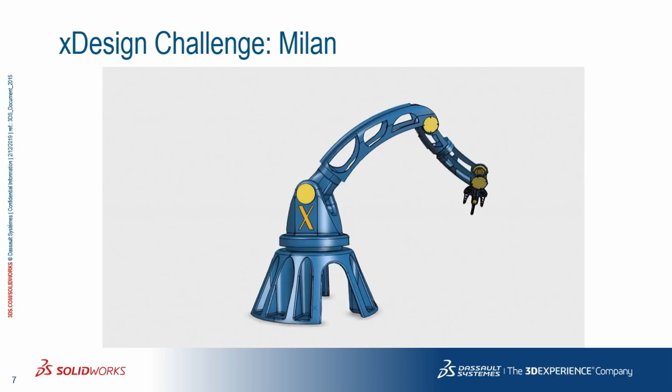So fast forward, we're here today. We've got the current release of XDesign, which I have to say is much, much more stable than it used to be. If anybody did any of the alpha sessions on Saturday or Sunday, I sat down with the recent release of XDesign, and I don't think it crashed once. And we were doing all kinds of new features and new functions that aren't even in it yet, and it was very, very stable.

So they're heading in the right direction, but you got to remember, it's a very, very young software. We're talking brand new, all right? So you're going to have complaints. There's going to be things you don't like about it. I have my list of things.

What you want to do is take that information and get it to SolidWorks. They need to know what's lacking in the software so that they can finish it. There's guys like Divi Lohiya, who's part of the definition team, Sal Lama, if any of you guys know them. They're the guys to contact. They're working on this project as we speak, and they need your input. SolidWorks, this is built with customer input. All of the software that Dassault makes comes with customer input. They're not just going, let's make this because we want to do this function. They make a function because somebody asked for it. So ask for it.

Yes, you can, and we'll talk about that. I'm gonna try to switch back. Does this sound like garbage? Up here it sounds terrible. You guys sound fine? Okay, it's throwing me off like something. Whoa, I hate doing the microphone because I always just present loud. As you can tell, I can fill the space.

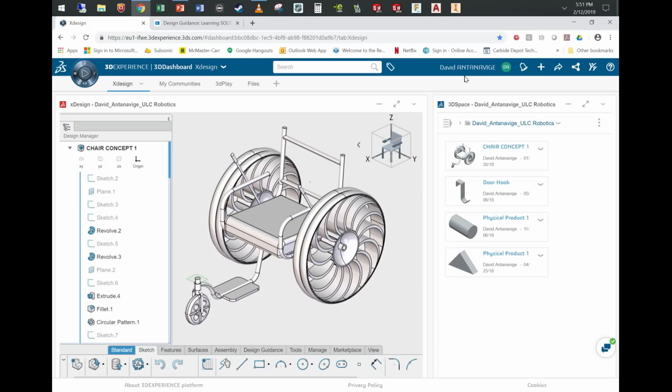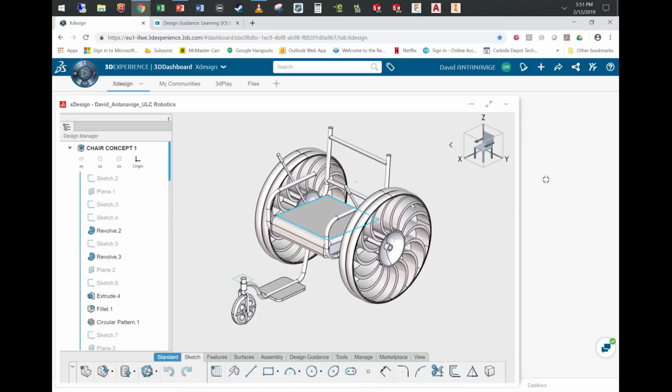When you create your first dashboard, it's up to you what it looks like. You can basically put little XDesign over here, 3D Space over here, grab 3D Play and drop that in the middle, and do all this stuff. You can customize this to whatever you want. It's really flexible. The intention is that you have what you want on the screen at any given point, the way that you want to view it.

So I'm just going to maximize XDesign for a second. Looking back up at the compass, this is where you start to drop all those things on the screen. So for example, I'm going to make a new dashboard really quick. I'm just going to go up to the top. You can see I've done this a couple times. I'm going to add a new dashboard, completely empty. I'm going to call it XDesign 100 because I feel like I've done this 100 times. And it's going to take a sec to load up.

Oh, and I should have prefaced, I'm doing this all live on the internet in a basement. Something's going to go wrong. Just bear with me, please.

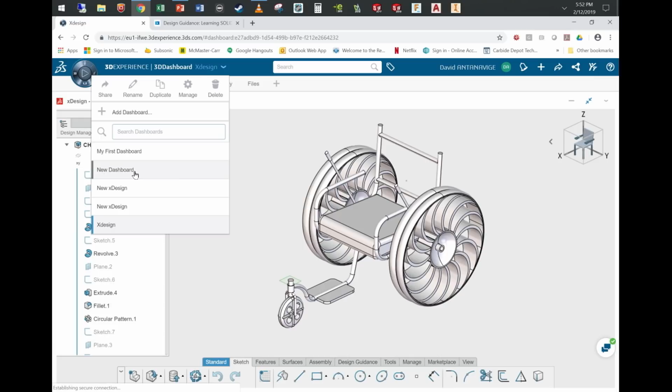New software. Here, we'll go to this one, new dashboard. This is probably empty. Okay, new dashboard. So this is what it looks like - it's completely empty, right? You don't see XDesign, you don't see any other drop downs. There's nothing. So you start by going up to the compass, and I'm just going to click on 3D modeling apps.

When you hover over any of these, it tells you what they're for. So up at the top is the social and collaboration one. I think this is the information and data one. And then if you're doing any virtual reality, crazy intense stuff, you go down here. But mostly you're going to be dealing with the 3D app or going up here to the collaboration section to pull up 3DSwym. So if there's a third part to this, there's the 3DSpace where all of our data exists, there's the XDesign app where we're manipulating all the data, and then there's 3DSwym, which is our community to share all the data.

It's a lot of stuff. The fun part is it's all just connected on here, so you don't really have to worry about it. If you're missing anything, you just go grab it - you go to the other link, the other section. And this system is set up so that if anybody is sharing stuff with you, you get little notifications over here telling you what's going on.

You can see up in the top right, too, there's a little icon - has everybody heard of 3DSwym? Does anybody know what that is? Okay, a few of you. 3DSwym is like a Facebook feed for this platform.

So, for example, if I go back to my dashboard, let's go to a good dashboard - XDesign. We'll close this so I can just show you what it looks like real quick.

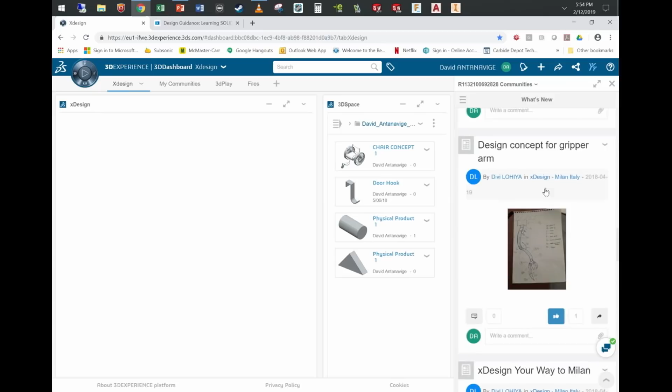So here's my buddy Kevin working on some parts, we typed some notes - 'Old guy in action,' said Thomas. Everybody just doing their thing, and it's just kind of a stream of what's going on. If anybody uses Slack or any programs like that, it's very similar.

The nice thing with this is you can attach all of your XDesign files to it. So like right here, instead of a picture, I could have an XDesign preview, and somebody could click on that and then pull up the whole model kind of live.

Is there a way to sort of filter this data? Like, do you have different projects? Yes. Yeah.

There are different swim communities. There's a public community where everybody's just dumping stuff on there, and then you can make your own community, or for your company, for example. You can have the ABC company community. It's private to you guys, and you can decide how the information moves on it. Does that make sense? Okay.

But we don't really care about that. We care about XDesign, that's why we're here. But you should just know about it. Another part of this dashboard is you can add tabs.

Let's say you really want to just have XDesign full on in the front, so I'm going to hit F5. F5 is your best friend for this, you're going to be refreshing a lot. You notice how XDesign wasn't there for a second, got to refresh. Again, it's new software, sometimes it loses. I'm also working on a Surface Pro 3 in a basement trying to use the internet, so we'll see how it goes.

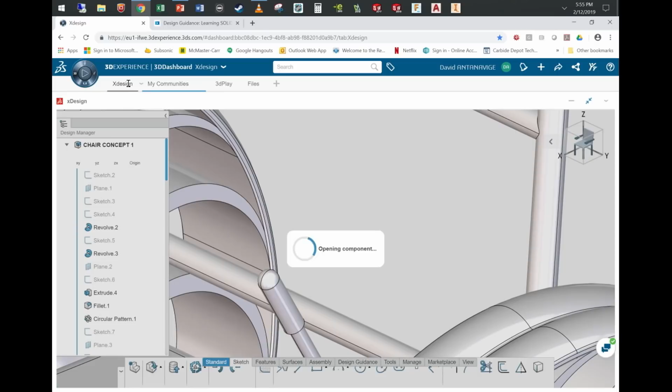But if you want to keep all of your community stuff on a separate tab, you can do it like this. So I've got my XDesign on one tab, all of my community information on another tab, and then my 3D Play preview window on another tab yet. And then I've got another spot where I've put all of my files, with my 3D drive on one side that handles my traditional files, and on the other side my 3D space, which handles all of my collaborative stuff.

You will see in the 3D drive sometimes some of the stuff that you did in the space. It tries to give you in the 3D drive access to everything. You just have to be aware that sometimes it's not a file. Like if it's an XDesign part in your 3D drive because you shared it with SolidWorks, for example, now you're working with a real file and it goes back and forth. It's a little confusing, I'm not gonna lie. But for the most part, it's all just backed up here online, and as long as you're naming new parts and making new parts, it's not a big deal.

So we talked about the dashboard, the feature tree. The feature tree in XDesign is now the design manager. You'll see here it's kind of typical to what we had before, you've got your planes and your origin. For future releases, you're not going to see those, they're going to go down to a different part of the tree. So don't freak out if you join the thing in another month and wonder where things are, there's just going to be a subcategory for the origins and all that stuff so they can separate stuff out easier.

But as you look down the tree, it's pretty typical to what we're used to seeing, right? We see all the features, we see them in order. We can guess that there's a line over here, that's probably our rollback bar. So we can go ahead and roll back to different points, delete features out. You can rename them, whatever you want, just like we would in SolidWorks, right?

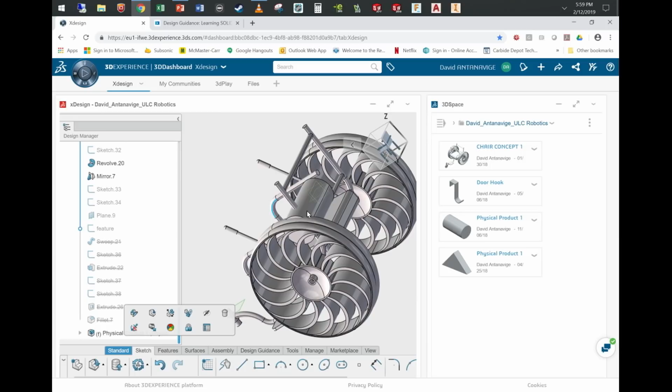No, you can't dissolve it. There's no dissolving it. It's just in there as it inserts it as a feature, like if you were doing a sketch or an extrusion. But then that feature, this file in here, if I edit it inside of this, doesn't necessarily push out to that part. It's part of this file now.

I know that sounds weird. It is a little bit weird. What happens if you edit it over on the right? Then it'll push the update, but I've got to update the whole assembly. So it kind of works all ways, some ways. It all depends on how you set up your permissions and things like that.

But anyway, let me back up a second. Okay, so you'll notice as we go to the top, my mouse is not being awesome. No bodies, no surfaces, no nothing. It's just stuff in a tree. So it's very different. When I first got on it, I wanted to hide this body, move that body, do all that stuff. You can still merge the bodies. It still treats them as bodies in Boolean. But you can't just go separate by a body.

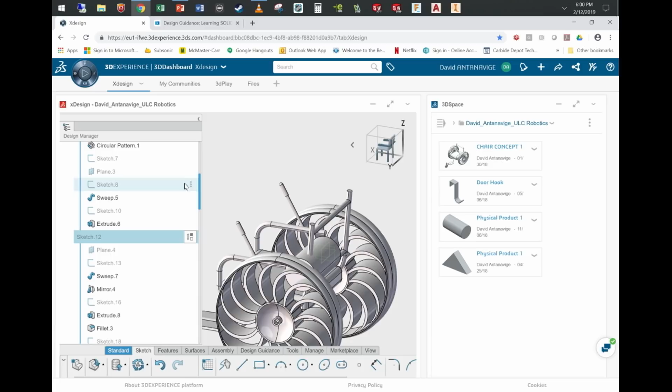What you would do is probably insert it. Oh, come on. That's cute. So we're going to do another F5. What you could do is insert that feature as a part, basically. You do like I did, and that's how you would treat it as a body. So you'd have to do it individually like that.

All right, so let's just check back what we missed real quick. We talked about the 3D space, how you get the app on there, and then the user help. Down on the bottom, these are where all your features are. We're used to having the command ribbon on the top, we've got it on the bottom now.

If we go down to Tools, we've got the big question mark in the center. Click on that, brings up the User Assistant panel. You can go through all the help files here, and it'll give you videos and tutorials and all kinds of stuff for how to step through it. So that's where you find your help file.

All of your toolbars are down here, like I said. Right now it says standard right here. I believe there's probably going to be a professional version, like they do with everything else, that'll come out at some version, a premium version that'll have more features, like simulation or whatever rolled into it. I'm just spitballing, but it seems like they're setting it up for that.

I just want to talk about the toolbars real quick. I think we're at that point. Time we got there. Okay, any questions on that? I'm sure there are, it's kind of ridiculous.

Real quick, just about the workflow. Yes, so that wheelchair - if I was to make that, I would have made all these different parts and assembled them. No, that's all, I just built it. I started in one end and just built it out. I think I started with the frame, then I made the seat, then I made one wheel.

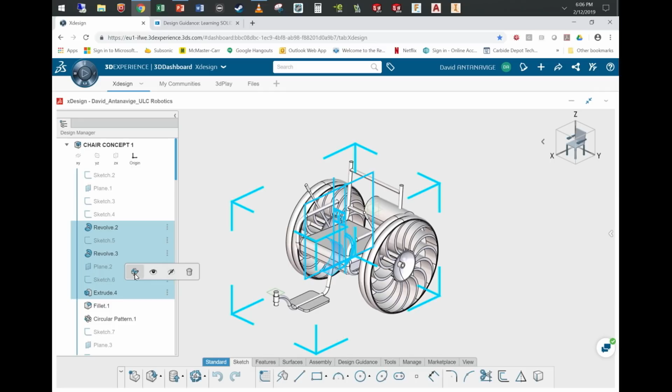So it used to be when you click on these - and I think if I do that right now, if I hit control and start grabbing, you can see I don't really have many options. All I can do is hide, show, edit some of the features, or delete. So they've got the new stuff coming.

But this keeps happening, this mouse doesn't like stuff.

Anyway, alright, let me just check how we're doing here on time. 5, okay, we've got till 6. You guys are still with me? Nobody's asleep, I don't got to do my DJ horn - bow, bow, bow. No, I was going to start with that, but I figured it'd be a little uncouth.

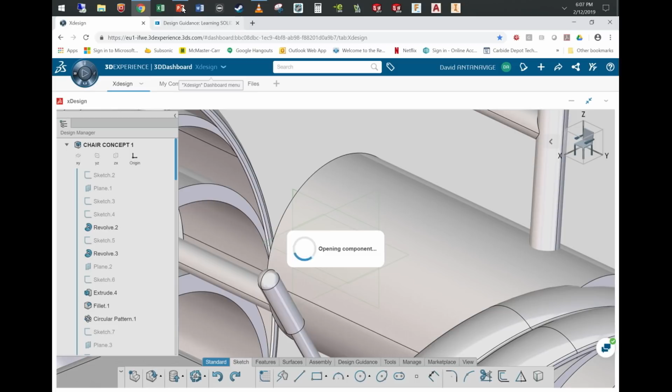So we'll move on. Okay, so we got XDesign reloading, let's drop back into the PowerPoint just for a half a second. And you'll notice I just did another F5 - I'm just refreshing. When I get errors in this thing, I don't wait for them to solve themselves, I just hit F5, it refreshes the browser, and you're right back where you were in 2 seconds.

This mouse doesn't love anything, though. All right. Wow, really? What's going on? Losing mouse functionality all of a sudden. This is fun.

Is it touchscreen capable? Yes, it is. I believe they're adding a feature where you can just sketch, draw on it with the stylus, and it'll drop in the sketch features, like they're doing in SOLIDWORKS 2019. So you'll have that.

Let's talk a little bit more about the GUI. I'm going to drop back... oh man, I'm having some nice issues. Server connection lost. Good times.

Don't worry, when it gets to the harder stuff I've got it all on video. We're just going to brute force through the GUI.

Looking across the bottom, we have all these various toolbars. You guys are going to recognize most of this stuff just from looking at it. We all know how sketches work. This is that gesture tool I was talking about, so you just draw on there and it drops it in. The thing that sucks right now is no splines, so it's all just arcs and straight lines. I tried testing it, making all kinds of funky shapes, and ended up with like a square box.

Yeah, exactly, for touch. So I assume it's going to be in here soon. I had a conversation with him over the weekend about it. I'm like, I want my spline, give me a spline so I can do some nice airfoils and stuff like that. So it's coming, it's just going to take a little while.

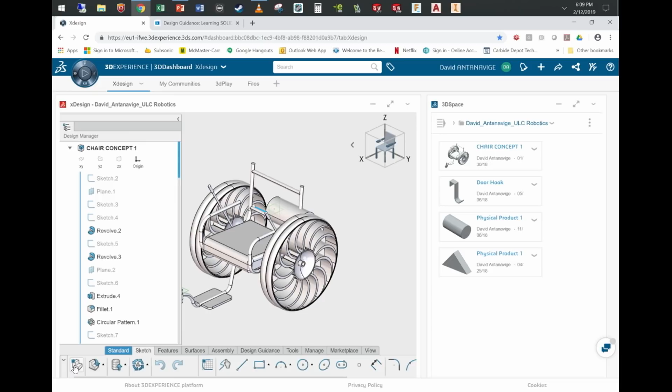But all the typical stuff—let's actually just start a new file. Click on new file down at the bottom. It asks you if you want to save, which doesn't really matter because it's saving anyway, but this is more of a so-you-feel-good kind of thing.

They literally told me that. They're like, people are just used to saving, so we added this in so they'd feel okay about saving it. Again, one more time, all right, we're not saving.

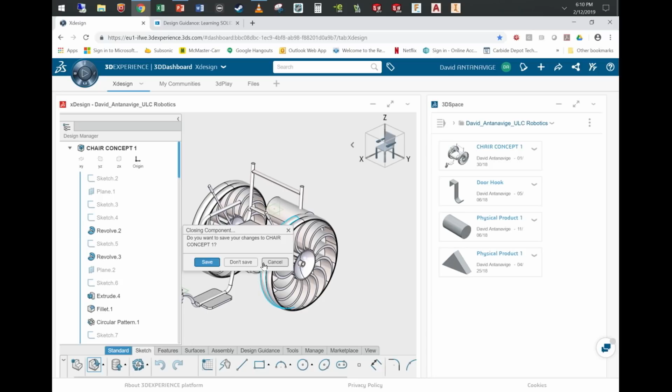Okay, so moving on, I'm going to expand this one more time. The first thing you do when you make a new part, it's going to ask you where you want to put it. I talked about the collaborative spaces, the 3D space—you've got to put this thing somewhere. You can't even start before you tell it where it needs to go, because it needs to perpetually be saving it. So I'm just going to put this in my LinkedIn XDesign folder, creates a new component. There we go.

So this is what I was talking about with the change. I just made a new part, and apparently I just got the new release—I think that's why I was having issues, it was updating my release. Now you can see my X, Y, and Z axis and my origin are now in reference elements, and my planes are on top. That was the change I was talking about. Apparently they gifted me the release 10 minutes ago; that's why I was freezing.

An email would have been nice. Anyway, I thought they were going to be here too. They kind of shafted me, all my XDesign guys. So this is recorded, so they'll hear that.

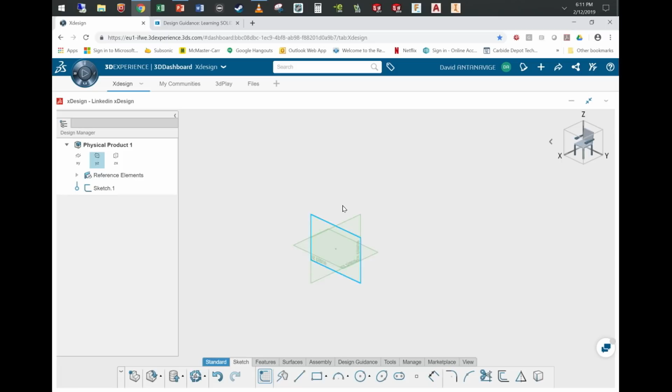So anyway, we go across the bottom—we've got all our typical sketch tools, right? So I can click on a plane, create new sketch. We all recognize these icons are the same ones in SolidWorks. Go in, just start sketching around, no big deal. What's kind of cool about this is it has all that shaded contour stuff built into it.

But it also has these automatic constraint flyouts. So if I click on one line, you can see the flyout toolbar automatically gives me a whole bunch of options. We don't have this in typical sketch—this is a thing that I really like. You know, when we're doing mates in our SolidWorks assemblies, we have those flyouts to do quick mates all the time. You just hold down Control, grab a bunch of surfaces, hit go, your mates fly together, your constraints fly together.

This is nice because now you can do your constraining on the fly without having to rely on things like automatic relations. If you've ever worked in big DXF or DWG files with automatic relations, it's crazy, it gets very cumbersome. SolidWorks wants to crash, or you just don't get the relations you want—it makes things concentric you don't want, lines parallel to the wrong thing, whatever. I like this a little bit better because it just lets you dictate it off the bat. You also notice over here on the left, it automatically put in a dimension as well, so I'm not going to another tool to put a dimension on it.

It's giving me the option right here while this is grayed out - do you want to assign a dimension to it? So all I've done is clicked on this thing, that's it, and I've got all of these options already. I think that's pretty sweet, and it's the same with all of the other features as well.

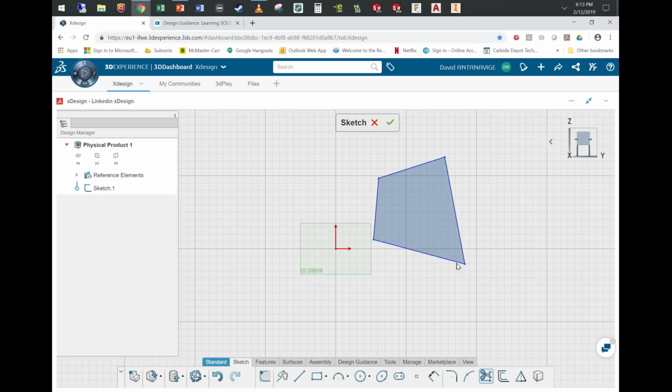We do have a trim feature. It doesn't work the same way as the power trim always does. There are some situations where it behaves a little bit differently, but generally it's identical - just trim. Doesn't have the go back option though, right? The go back and untrim my trim - so that's a little lacking, but they're working on it.

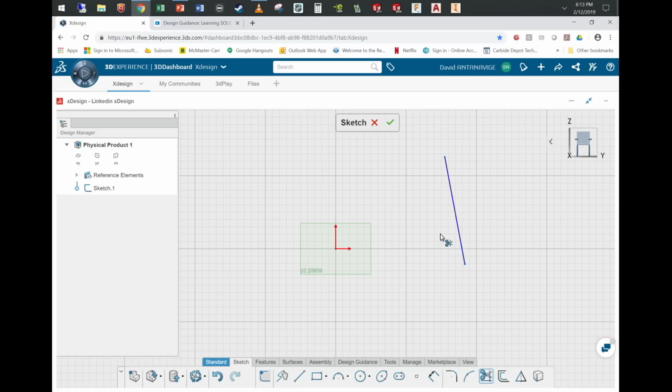Offset, mirror, we know all about that, and then convert entities, right? So you're working in a different area. I always say steal everything you can - just steal geometry, stop remaking it.

Yes? Are you saying there's no control key? No. In Power... I just did Control Z. Control Z. But what I mean is, in Power Trim, if you guys might not have noticed this...

As you go along through an entity, there's a little dot that forms right there, and if while you're still holding down the mouse button you back over the dot again, it brings that entity back. We all do it - I trimmed 5 things I didn't want to trim on accident. Don't let go of the mouse button, you just drag back over those and it'll pop them back for you. You can kind of do a back and forth thing, but they don't have that here yet. I like that feature a lot because I'll be trimming stuff and kind of be like, is that right? And go back when I'm doing huge layouts and stuff like that.

So that's our sketch tab. I'm going to move it along a little bit because we do have to get through a lot of stuff.

No mouse gestures yet, but I was told they are working on mouse gestures. Actually, this release might have them, I'm not sure, but back in October there was still not mouse gestures, but it's on the list.

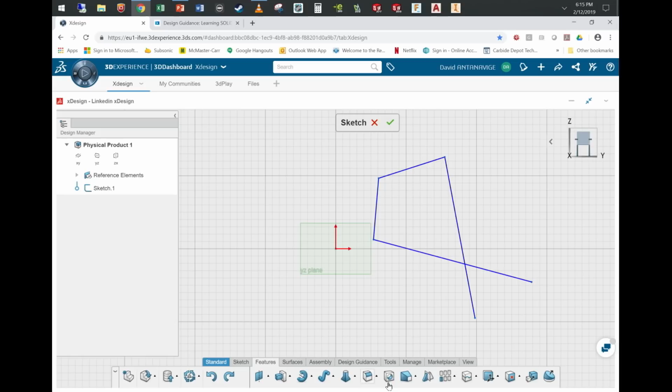So that's the sketch. All right, features - we've got all of our typical features down here like we had before. We've got planes, we've got extrusions, cuts, sweeps, all that stuff. There's one big difference with this one.

So I'm going to make an extrusion out of this sketch that I just did. I'm just going to select that profile right there - if it'll let me select it, we'll rotate a little bit so you can see I get the preview. You'll notice if you look right up here, we've got a lot of functions in one.

Your extrude function in XDesign works as all of the extrusion type functions in one. So if you want to extrude a body, if you want to cut a body, if you want to extrude a surface, if you want to cut with a surface, if you want to do a thin body extrusion, they're all here in one feature.

Okay, they don't have all of those features all blown out - all you have to do is click on the options. Right now, cut and new are grayed out because I don't have anything created yet, but I can make a thin feature or I can just make a surface. They have surfaces in here just like you would in SolidWorks.

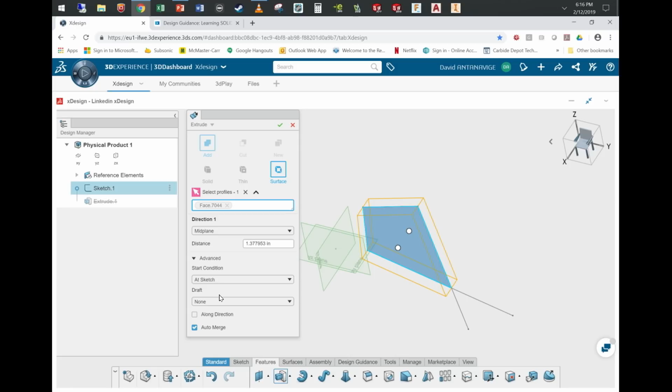It's got all the other options we're used to - mid-plane, up to geometry, advanced options, merging, all that fun stuff. We still have bodies that merge together and all of that stuff, they're just not multi-body parts. So anyway, that's the highlight for extrusion.

Most of these other features are all the same - the hole feature is a little bit different. Let me just back up real quick. We'll extrude this and put some holes in it.

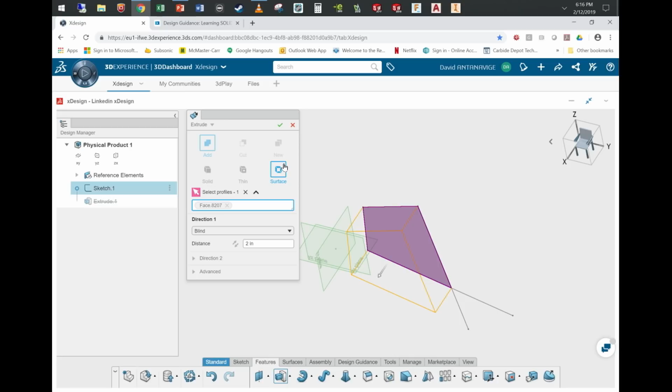What's also cool is if I go in to edit this, I can still change it to a thin feature or a surface after the fact. That's pretty sweet too. You can change your mind, and you can't do that in SolidWorks right now. That's pretty baller. But I mean, this is basic stuff, we're talking about extrusions here, so we can't get too hot to trot yet.

Hole wizard works a little bit different here. In SolidWorks, you could go to placement and just touch on a surface, and it would bring up a sketch and you could start locating it. With this, you've got to have that geometry in there first. It needs the points first. I don't know if that's good or bad, but that's just how it is.

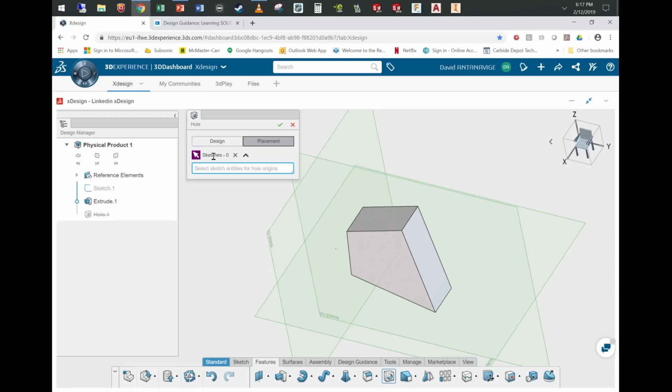So when I say placement, I'm going to grab stuff, and you can see up here it's looking for sketches. You need to have those points in there, but it works exactly like the hole feature we have now. You can customize it, use all the standards, they've got everything built into here. Pretty basic, but you've got to have that sketch on top and put a couple points in there. So we'll do just one right in the middle real quick.

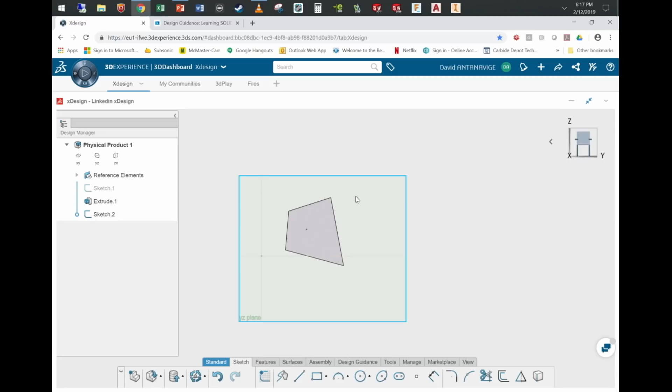Go back to the hole.

And you can move this stuff everywhere, you can customize this interface and just drag stuff wherever you want to, so whatever works for your workflow. I know I have some guys that operate SolidWorks and all their task panes are in like 3 monitors away. If that's what you're down with, you can do that with this. You just got to have the browser be big enough to fall into all of those. You can collapse everything down, all that kind of fun stuff.

Placement, so we're just going to select that point.

Is there no indication of fully defined sketches or anything like that? Yes, there are, just like you would in SolidWorks, it goes black.

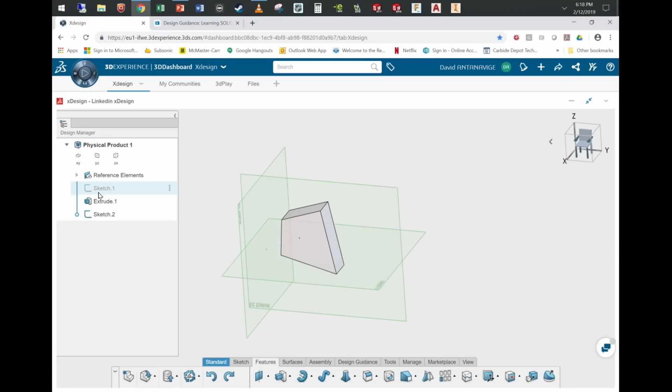If I go back to this first sketch, right now it's all blue, like we would normally see an underdefined sketch in SolidWorks. Nothing in the tree, no minus symbol. No indicators, yeah, your tree, the design manager, has very few indicators right now. Basically, you would just have to know that when you go... well, let me back up.

Who's fully defining sketches these days? You fully defining sketches? Yeah, for what? I'm curious, for what?

Why'd you do it? Or are the only people touching it ones who know better? Right, they know better, they're professionals. So I'm not saying don't fully define your sketches, that's the proper way to do it, but a lot of professionals out there just don't waste their time anymore. They use other things to control the features, or they put a note in there saying don't touch this, and you just go, because it's time.

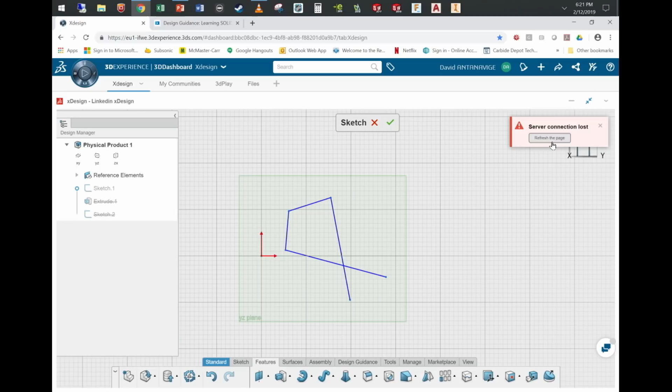Yeah, I wanted to see you define that one. Yes, I'm going to do it. I'm just refreshing it, lost connection to the server. That would suck. Yeah, just continually spending 30 seconds.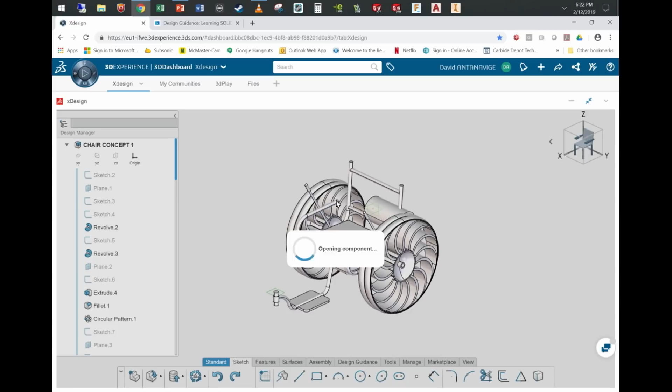Okay, let's go to the screen. So you got to have a good internet connection, not like in a basement in a conference room, and you probably shouldn't be using a Surface Pro 3 anymore to run it either, because even Chrome chokes this thing out a little bit, so it's kind of not ideal.

But anyway, so we were looking at that sketch. We'll go back. So my sketch that I started isn't here, right? We're not seeing it there. So I'm going to go back to my collaborative space, and we're going to go down to the bottom and find the physical product, whatever it is. So what is it... we got to find the one from today. This is the thing that bothers me.

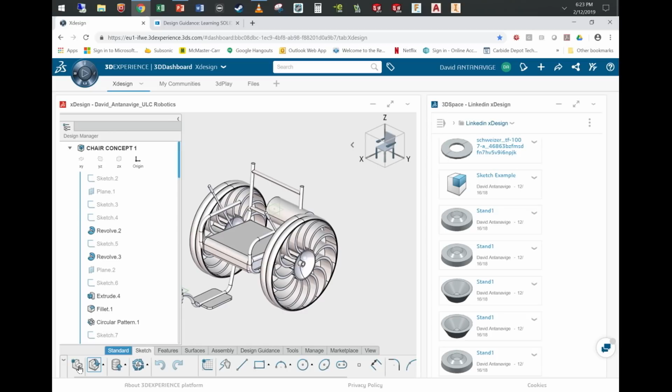Your internet needs to be very good, because here's what's happening right now. I was working on that sketch, that new sketch, and it saved everything—I'm telling you, it saved everything. But what I'm waiting for right now is for it to come back from the SolidWorks Dassault servers in Waltham to come back to me. So that can take some time. Again, it's new software, so you got to take it with a grain of salt. But there's other highlights we're going to see coming down the chute here. We'll speed this up a little bit. Okay, so I'm not going to talk about that right now.

I just want to back up one second and talk feature tree. We talked about that, design manager versus the feature tree—they're very different. We've got all these different toolbars. We started looking at the sketch tab, the feature tab. You've got all your surfaces, like surface features like you had before. And you do have some assembly features. Even though it's not a traditional assembly, they know you're going to want to treat things like assemblies. You're going to want to put mates in there, do patterns, mirror features.

Somebody was asking about the wheelchair before—like, I could mirror the wheel over, and half the frame I mirrored over. I just basically built half and then mirrored the whole thing. All those features are in here.

Tools tab—here you'll find, I would equate it to our evaluate tab that we have right now: all your measure features, your weight features, any draft analysis you're going to do if you want to send it over. They've also got some tools for 3D printing. If you have a Sindoh printer, it basically plugs right into this software, and you can just hit go and it goes right to the machine. They've got some collaboration between the two, but that's the only one I know that has that. Otherwise, you're just prepping your files to kick out to whatever machine you're using.

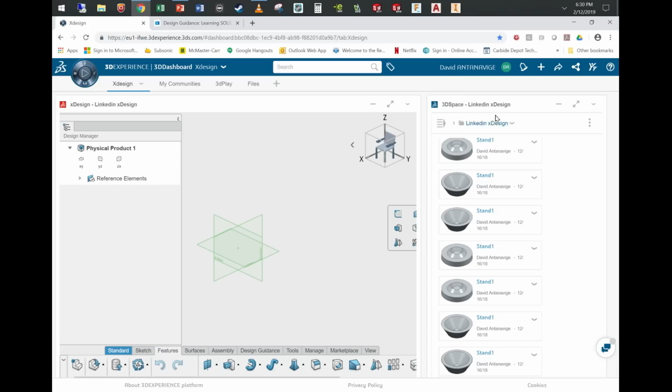As far as I understand, off the top of my head, because I've had to sign some NDAs to get access to the software—anything you create here is your property. But you have to pay attention to your 3D space you're working in. If you're working in the common space, everybody's there, everybody can see your stuff. Don't work in the common space, because once somebody else sees it, you're done—it's like anything else, you put it on LinkedIn, it's gone. So you want to use dedicated collaborative spaces, which you can create yourself, controlling who gets access and what users get in. It's all just funneled through Dassault.

Questions? Any other questions for design guidance? Okay, features—everybody's cool on features? I don't think I missed anything in these. Nope.

Like I mentioned, you can save, and you can do a save as if you want to make a copy. But again, it's always saving, so that's there just to make you feel good. They'll probably have a save as at some point, or a make copy button.

If you want to copy a feature or something like you do in SOLIDWORKS, I'm pretty sure you can do that. It might not work perfectly, because it builds features differently—whereas you might be used to grabbing a body or sketch and copy-pasting it, it might not always work the same. But when I've done 2D work, I've copy-pasted and made copies of stuff all over, and it was cool.

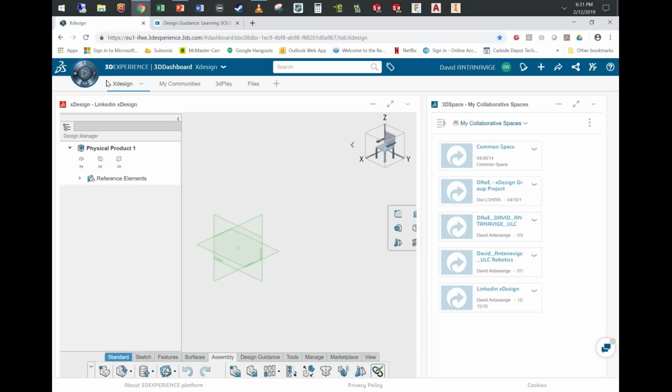Is there an export? Yes, there is an export—I just have to remember where it is. Would it be under share? I don't know, it's not. I think I have to do it from here. Well, can we move on with the presentation? Yeah, we'll come back to this. Sorry about that. All right.

So, design guidance—does everybody know what design guidance is? Generative design—has anybody heard of that? I'm getting some hands, or no hands. That's how I can gauge it, okay.

So generative design is—let's say I have a scenario, a water bottle, and I want to make sure I can run over it with my car because I'm crazy. You model up your water bottle inside XDesign, you can apply some loads onto it, and then say, I don't really know what the shape should be yet. Maybe I just start with a brick of plastic, apply some loads, make a cavity inside that'll hold the volume of water I want, and then let XDesign figure out what shape I need to handle the loads I define.

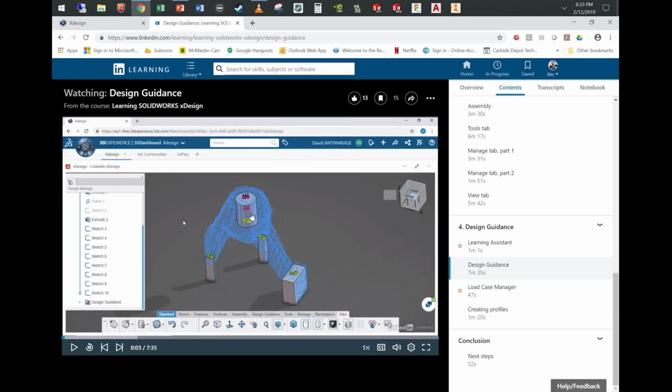If anybody's seen Desktop Metal's generative design product, it's very similar to that, though I don't think it's quite as powerful yet—they have a very powerful generative design software. But you can see in this example, we're basically making a stand. You have to define some locations, so you model in where everything's going to connect. I'm saying okay, I'm going to have a couple feet, and I did various weird sizes just to kind of prove a point in this example.

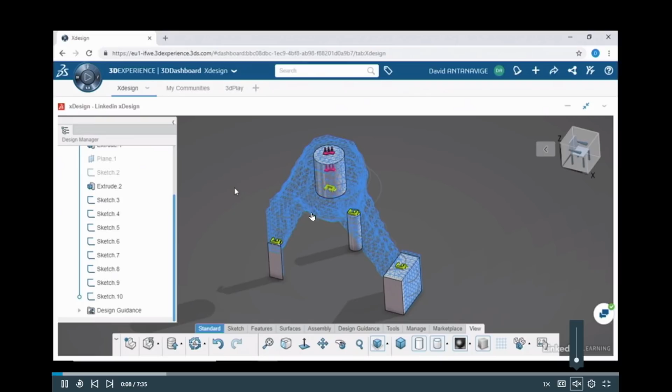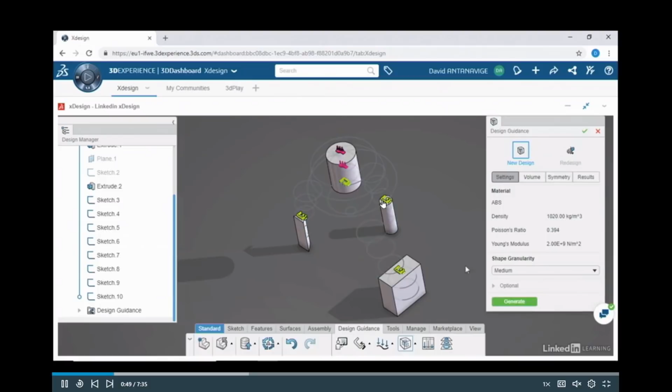But basically what you see here is the beginning result of the design guidance. As we scroll through, I've dictated loads at each of these using the clamps and load features down here. Then I ran a new design, which is what it's called, and this is the output I get. So I'm going in reverse, but basically you go into design guidance, say run this new design once you've set everything up, and you can adjust things like how much mass you want in it.

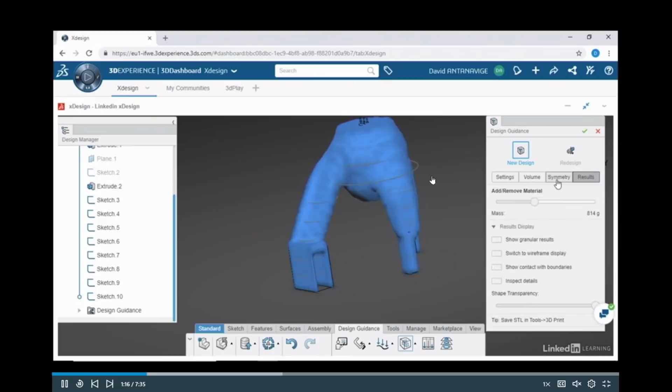Do I want it to be really thick in certain areas? Do I want to make it more granular? Do I want to redesign it because I've changed my loading in some area? Then you can take this output, it'll give it to you as a solid body, and you do what's called creating profiles, which will slice it. You say how many slices you want, and it gives you a sketch at every level.

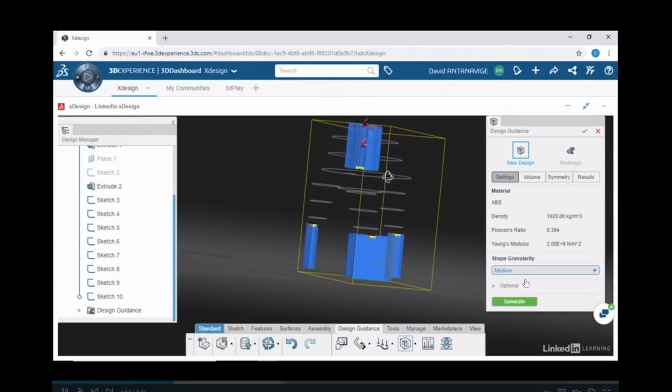So here I'm just messing around with the various options just to show how it changes. I've set a material as ABS because I'm going to print this out on a MakerBot or something like that. But it's pretty easy to use once you get into it.

It takes a while because it's online, right? You're asking it to do simulation results. And when I say a while, I mean like minutes, not like an hour. You might wait 10, 15 minutes if it's something very complex, but the simple stuff takes like a minute. I've done some simple ones where it's just 2 clamps on the side, downward load, takes like 30 seconds and it just runs through.

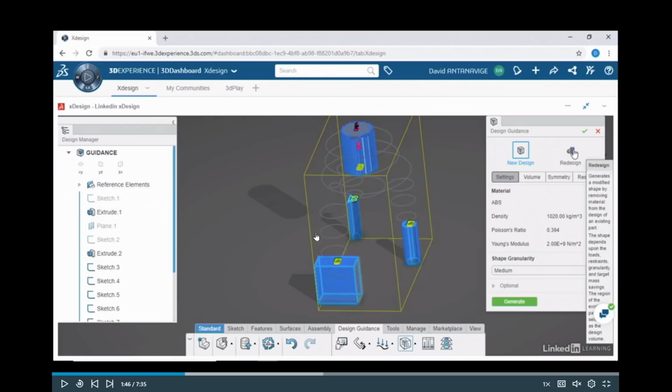So when we're in XDesign, let's see if I can pull up this example that we were just looking at. Notice how I have 2 XDesigns open too? You can do that.

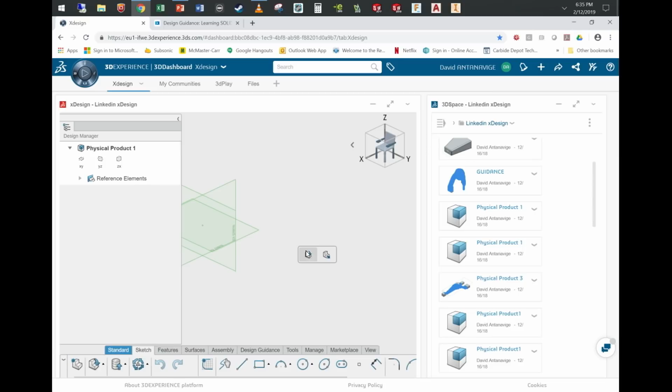All right, so this was one of the design guidance parts we did. You basically start from left to right.

If you want a specific surface not to move at all, you use what's called a clamp. So like this surface can't move. It's a hard extent of something, it's the corner of my bracket, it's whatever. It can't move. The earth is there, whatever, that's how you do that.

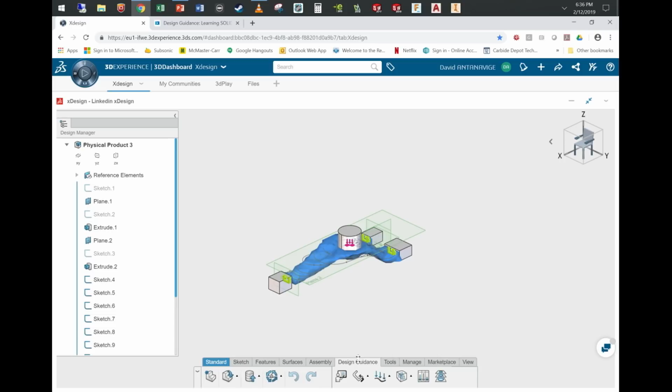So here what I said is these front faces cannot move. So I put a clamp on each one of those, and you just hit the clamp feature, go in and select a face, and that's it. It's pretty easy, so that's the first step.

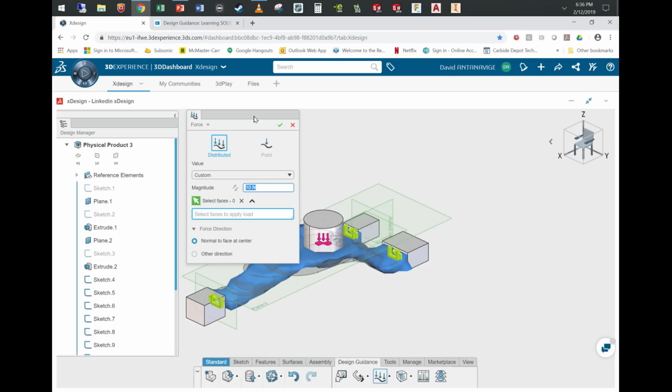Then I go over to my forces. What's nice about this is they've included a bunch of typical forces that you can use. So when you click on force, I've got custom in there right now, but if you go to the drop down: force to press on a keyboard, soft push by hand, hard push by hand, average adult weight, human climbing stairs, a compact car. Those are pretty sweet to just have off the top of your head in newtons, like you'd be doing some math otherwise.

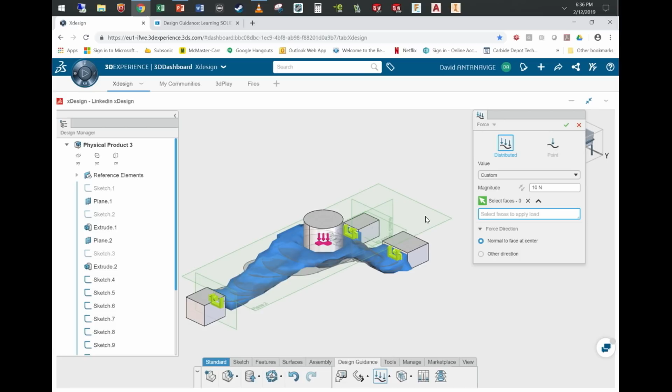Excuse me. So you can see here, this purple face in the middle is where I applied my force. I applied it on the underside of that cylinder, and it's pushing down from that face. Okay, so once I did that...

You can do pressure and torque as well. So in here, the design guidance is done by the design feature right here, so there's new design and redesign. You can iterate this over and over and over again.

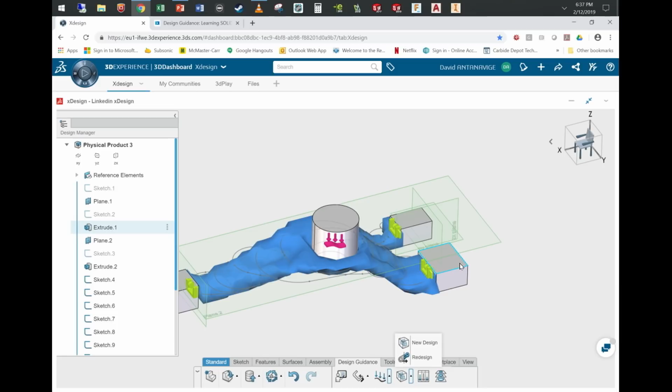So let's say I had some geometry out here that I wanted to change. I wanted to make those faces smaller, bigger, wider, rounder, whatever. You make those edits and then you say redesign, redo the design I've already done, and it's just basically reruns it. But if you're starting a new design, you just have to go through and set everything up.

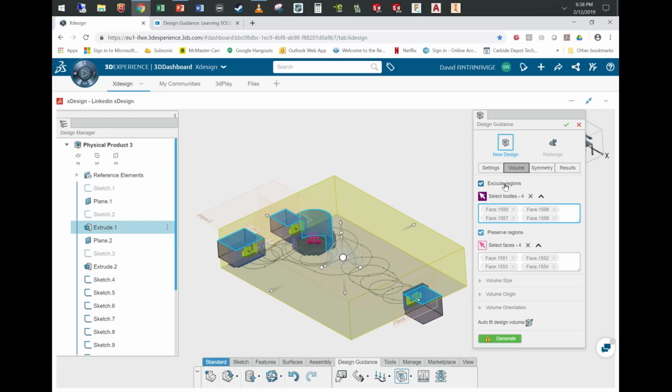So the biggest thing is you set a volume. It just comes in as a square typically, and you say whatever we're going to generate has to exist inside of this volume, and it's pretty easy to create. You just give it a few regions to exclude, starting from the top down. So I told it the face on top, the face on the side of the cylinder, I don't want them included in this shape. Those just have to be free and empty. We don't want any part of the design to overlap and grab on top of those.

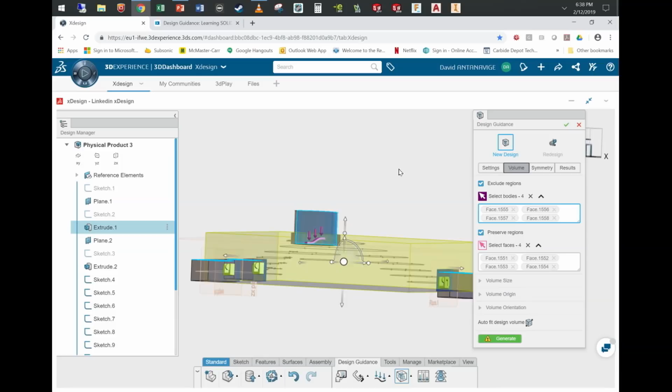You basically take this box, if I can scroll right, and you just grab the arrows and literally say how big you want it to be and create your envelope. You tell it if you want any kind of symmetry.

And then you see the results at the end. This is the previous one that I ran before, so you can see that there.

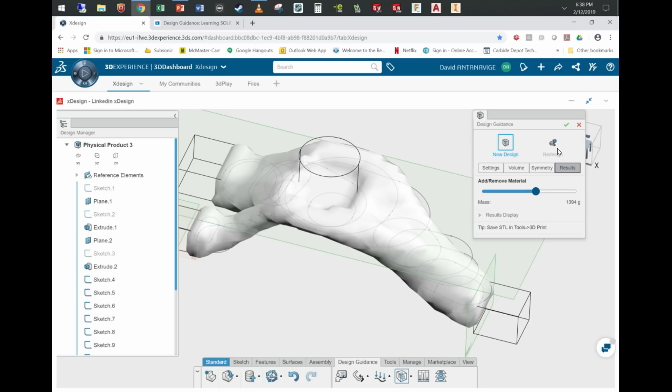You can always add and remove material. If you know your part has to weigh a certain amount of grams, you can set that right here and say, okay, we've got to get it thinner, got to get it lighter, and make that adjustment.

When you're done with all that, you've just got this form right now. It's not geometry that you can use, it's a representation. If you wanted, you could take that form and push it right to a 3D printer and print it out, so if you just want a blob printed out really quick, you're there now.

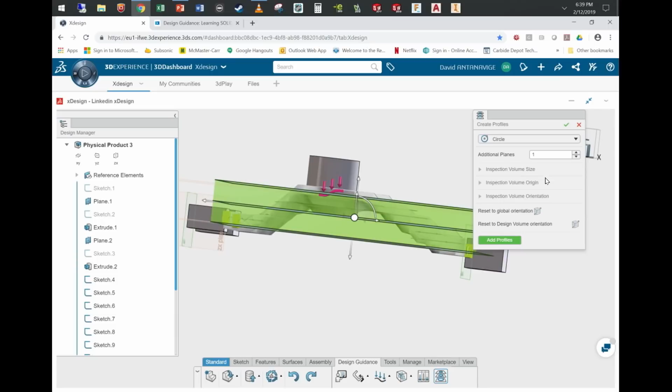But if you want to do actual refinement, make that geometry in there like you want it, you go over here to Create Profiles. Just hit that button and it basically handles everything automatically. You say how many slices, how granular you want to go with creating these profiles, and then you can do a sweep or a loft, pull them all together, do some extrusions, whatever it takes to get close to that original shape.

So it's really not that complex, but it can take a little bit of time if you do something that requires a lot of analysis. If you have various forces all over the place and many clamps, it's just going to take longer since it's doing more simulation.

But I think this one ran in about 5 minutes. I built it real quick, ran it, and then I was done, ready to go. Any questions on that? Oh yeah, sorry, you had a question before.

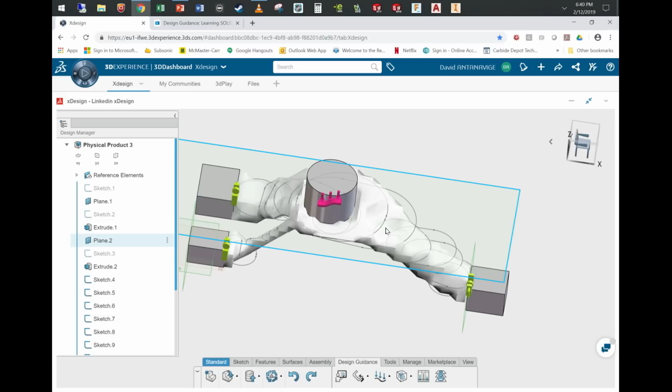Can you change the direction of the profiles from the Z-axis to the X or Y? I think you have to do it when... actually, Divi, you're the man to ask. You can change it, I'm just not sure how, I haven't done it yet. But I believe you have to change your orientation because that's what it's queuing to.

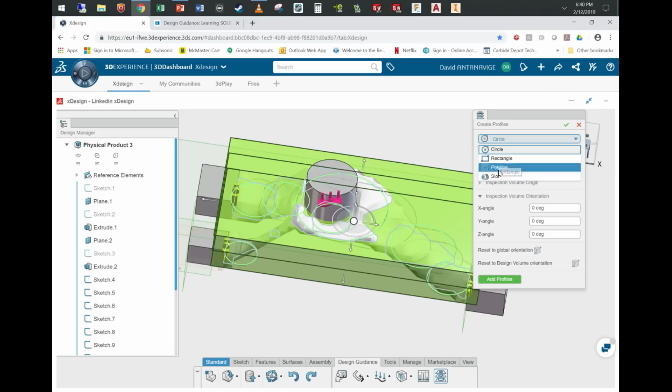So yeah, if we grab... oh, and you can do different profiles too, I forgot to mention that. If you want pure profiles of the geometry, it'll give you those polylines too if you want to do really wild stuff. But yeah, you can switch directions.

There was another question. Yes? How do you tell when it's internet lag or when it's thinking?

When you've become disconnected from the server, it tells you. It comes up with a red box, it's very obvious, and it says you've lost connection, hit F5, we're going to reload you.

When this is running, it'll have a little status bar up there just saying we're running. When you're using the features, sketching, extruding, all that stuff, it's pretty seamless. So it's not going to be like SolidWorks where you're getting that white haze and it's waiting and processing in the background, it should just go like that.

In my experience, it's either the feature just executes right away, or you get that warning that you've disconnected from the server and you just got to refresh.

Other questions? Yeah. Remember that this is completely web-based. What you're really doing is using a client to communicate to a server, right? So all the processing is really happening on the server, and there's this communication happening.

So when you see a message that you're disconnected, the computation is still there. All that's happened is that right now the communication is broken, and as soon as you press F5, that communication is reestablished.

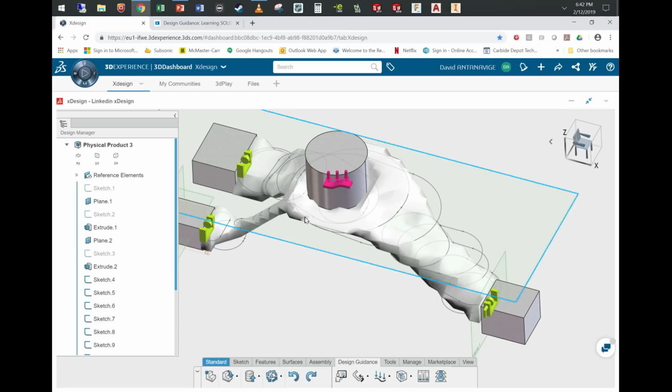So there's a couple things we kind of skipped over, but part of all of this, there's a few new things as well. There's the 3D Experience Marketplace. So you've designed your part, maybe you want to get it 3D printed, you can load it directly up on this website. You'll get 400 quotes in like a minute, pretty awesome. Just scroll through, pick what you want.

It's very easy, I'm not going to go through it right now. You literally just click on the Make Marketplace button and it'll take what you have on the screen. There's one little dialog that comes up that says are you ready, and it takes you to the browser, opens a new tab and it's right there. You select your options for what you want, various materials, what process you want to use, all that kind of stuff.

And then it just literally gives you a list of vendors to choose from. So that's pretty cool if you're looking for sourcing.

There's also part supply. So this works like when you guys download from McMaster-Carr and fill your assemblies up, this is that for this. So you want to find all those bushings, bearings, parts. A lot of vendors are already on the platform, they've got all their models up there. They're very descriptive, there's a lot of information that comes with these parts, which was kind of surprising to me, like full spec with the part. It's kind of cool, but you got to be using those kind of components.

This is what it looks like when you get on there. It almost looks just like McMaster when you load it up, if you're used to doing that like I am. When you delve down into the specific parts, you get that interface. They showed it in the preview today, where it's all of the spec information and the model preview and everything, and then the option to dump it in your current assembly.

I don't think I spoke about the learning assistant. So when you're trying to do design guidance, if you're having any issues, this is similar to that help file. For the user assistant, it's the learning assistant, for how to do various design guidance examples, and it literally just walks you through them. It says, okay, we're going to do a design, walk me through it, and it's pretty cool because it steps you through each part of the process and how to do it and what it looks like. So definitely use the Learning Assistant, and in the Tools tab, the User Assistant and the Learning Assistant, all the help's right there.

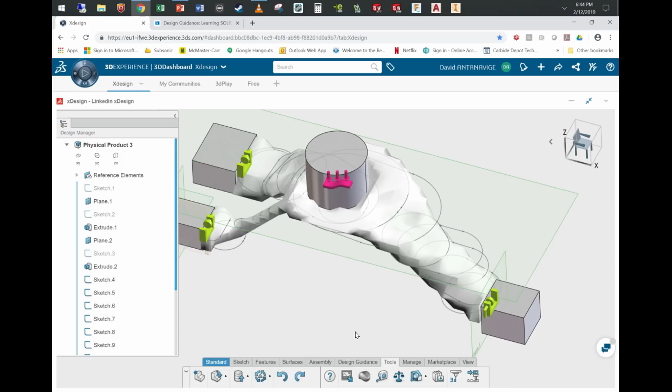So everything I messed up, that's where it's right. I think if I look back, that's most of the material I wanted to cover today to make sure you guys see everything. We'll just look right. Yeah, I think that's about it.

Are there any other questions on XDesign? Remember, it's new, have patience.

It was a little rough when I started on it, but seriously, it's come a far way. When you get home and you're on a machine that's not my Surface Pro 3, I think you'll find it can click along a lot better. But have that good internet. Don't have like that weird, my cord's barely in kind of thing going on. Make sure you're plugged in because you need to keep that connection to the server. That's paramount for all this.

Past that, like I said, join your local user group.

Yes? You know how they're going to market it? Is it going to be like a supplemental tool for SolidWorks, or market it to SolidWorks users? I think, Divi, you can maybe speak to that better than I can, but they're not really excluding anybody, they want everybody to join. When you say market, you mean commercially or do you mean? Well, or like, how will they package it? Are they going to offer us packaging?